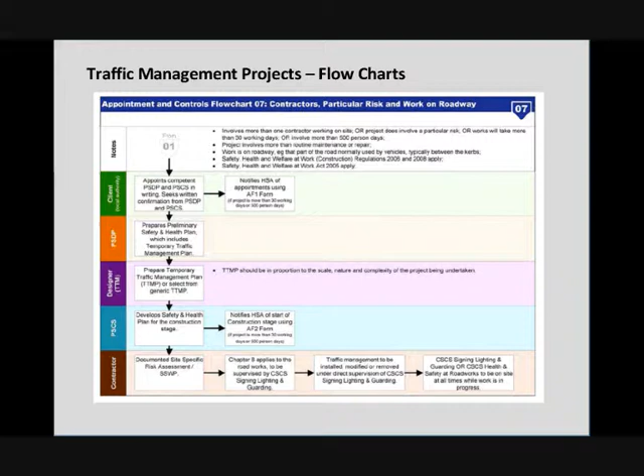Contractors are starting to pick up on this, and they're starting to ask for much more details than what's being provided by our typical PSDPs, because ultimately, if something happens on the site and it's found out that there was a problem with the design, it will now come back to the PSDP. It will fall on their head, and it very clearly states it within this document.

One of the other paragraphs which I've taken out, which highlights again the importance of the preliminary traffic management plan and the role of the designer, is at construction stage. It states that the implementation of the temporary traffic management plan is coordinated by the PSCS. It doesn't say it's designed, it's coordinated.

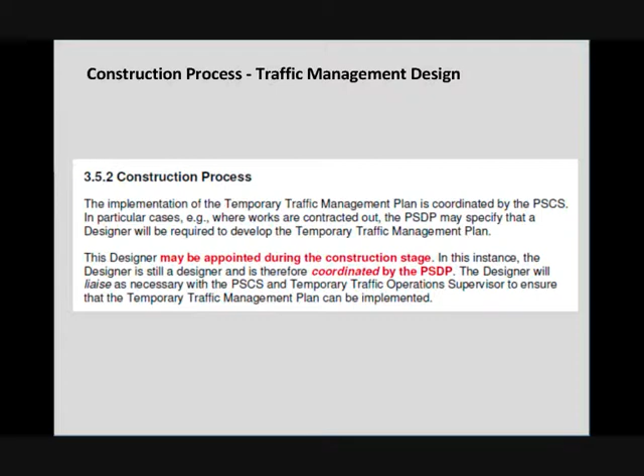The designer may be appointed during the construction stage, and that's generally what's been happening up until this point. However, the designer is still a designer and must be coordinated by the PSDP. Nine times out of ten, this is not happening today in Ireland, and there's a few familiar faces who would be testament to the fact that they're not being provided with enough preliminary information by the PSDP about the designs for construction.

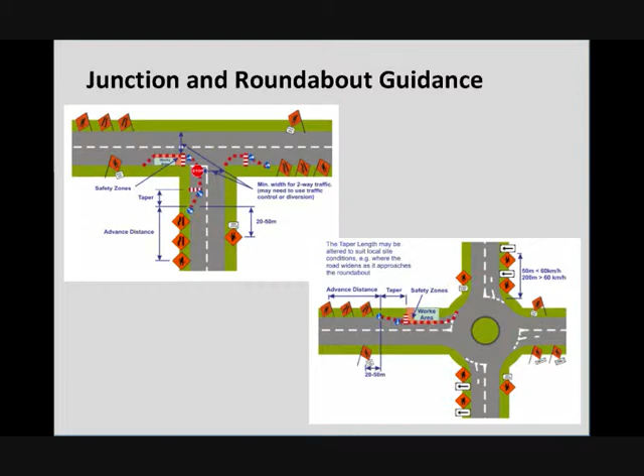Here's a few examples of the new junction guidance available within the guidance document. Previously, any documentation from the Department of Transport showed perfect straight roads, nice idealised situations. They're now beginning to recognise that those of us involved in design need temporary traffic management plans for roundabouts and junctions, not just straight sections.

We're very proud to say, from a company point of view, that the guidance now within this local authority document has been sourced from our temporary traffic management design course. So we've been involved in the consultation at this stage.

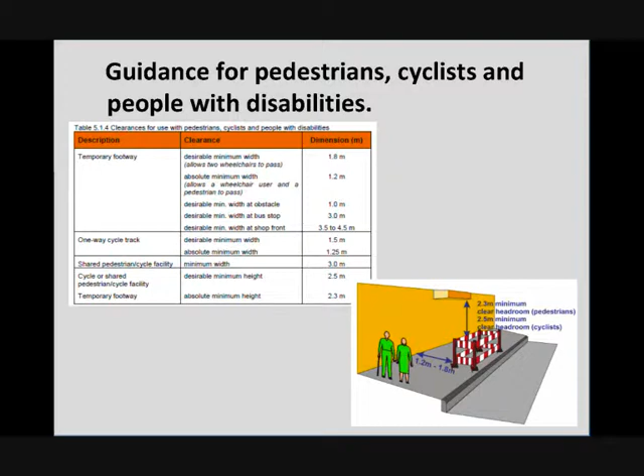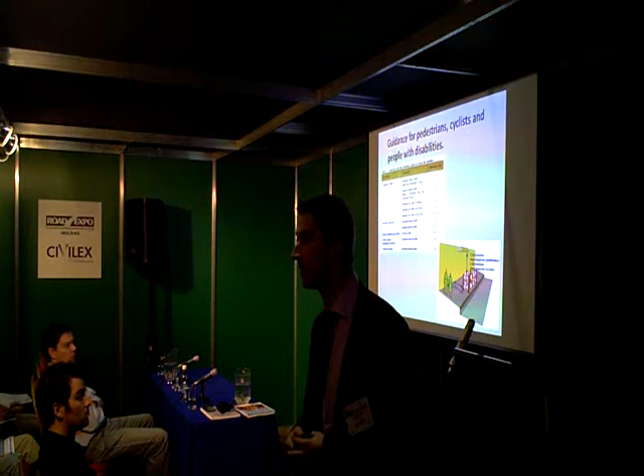Also, pedestrian management is given a much greater emphasis. As a temporary traffic management designer, one of the problems I always hate to see coming up against me—and I see some people here from local authorities who will very well know—pedestrian management is one of the areas most difficult to control. You can control cars in lane closures on dual carriageways, no problem, but bring somebody with a buggy or a wheelchair or a small child and you've created a whole new set of hazards. So there's a lot more guidance now in terms of the dimensions recommended to provide to pedestrians.

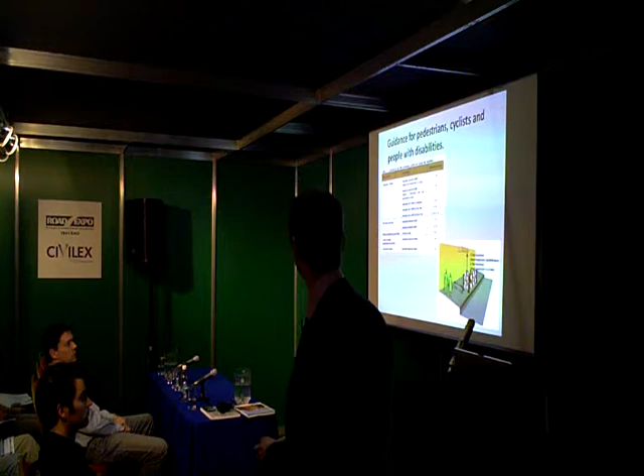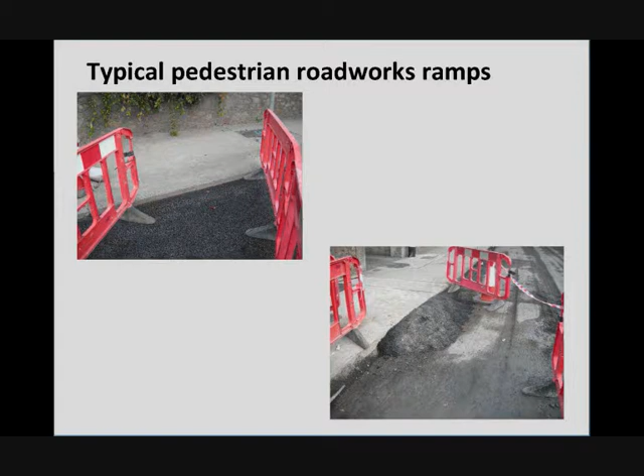Let's take a look at those two photos there. I think you'd all agree that's something fairly typical of what you'd see around the towns and cities of this country. Footway is blocked by some roadworks, and if you're lucky you might have some barriers directing pedestrians into a temporary pathway. Nine times out of ten there'll be no ramp for them.

If there is a ramp, sometimes it'll be a bit of quick set tar, and the buggy user or wheelchair user will be expected to navigate that ramp. So the new recommendation is, where possible and practicable, that you provide a ramp at curb level to take the wheelchair or buggy user out at the same level as the curb, and they rotate at 90 degrees and travel along the pathway parallel to the curb.

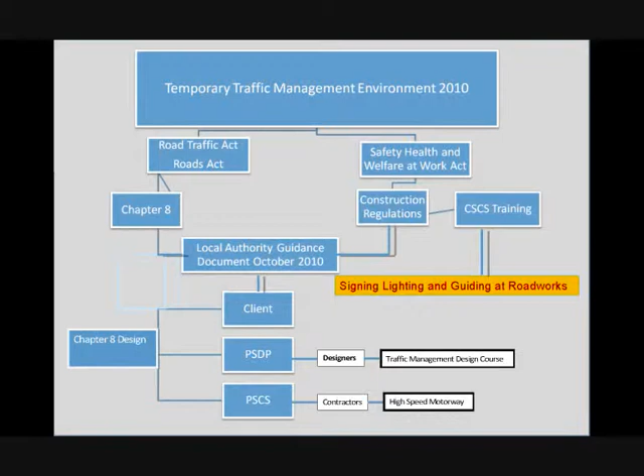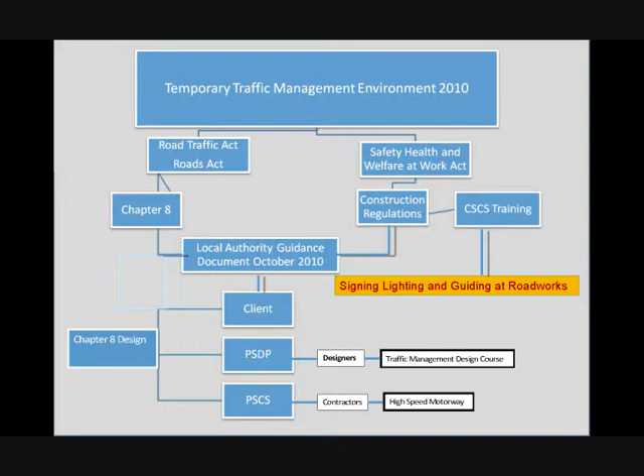Back to our chart. We're going to look at the changes now in the sign, light and guarding document. Just so you're aware, if any of your operatives or anyone you know is using the charts previously provided to them on the sign, light and guarding course, they are out of date—they're wrong. If you see anybody using the old charts, take it out of their hands. It's available now on the Department of Transport's website, and we also have a copy down at the stand if anybody wants to get it from us. But it is out of date, so just be very aware of that.

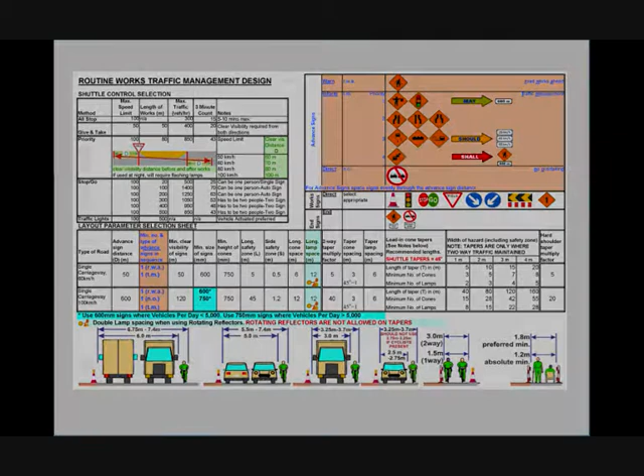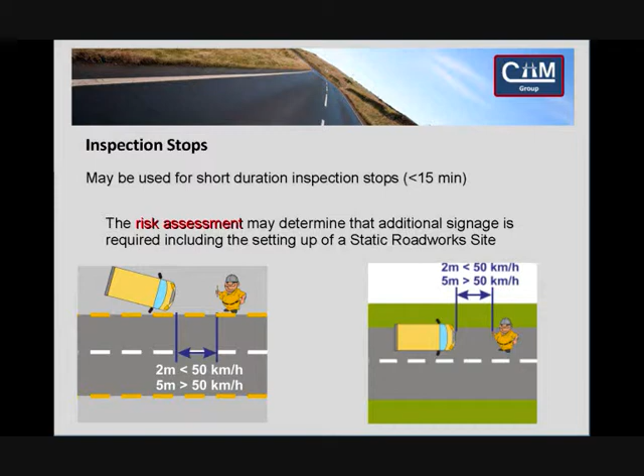Inspection stops and surveys—this is specifically very important for our local authorities who carry a lot of routine works and inspection stops. This is a diagram not previously shown in any guidance document: the use of a vehicle as a warning mechanism in front of an operative. It's in there within the sign, light and guarding, not within the guidance document, but use extreme caution, because obviously it's a very dangerous situation to use a vehicle as a blocking mechanism for an operative in front. So I have risk assessment there in bold writing just to make sure it's not used just for the sake of cost savings. It is to be used where it's practicable.

Convoy operations, not previously covered in any other course, is now described within the new sign, light and guarding course.